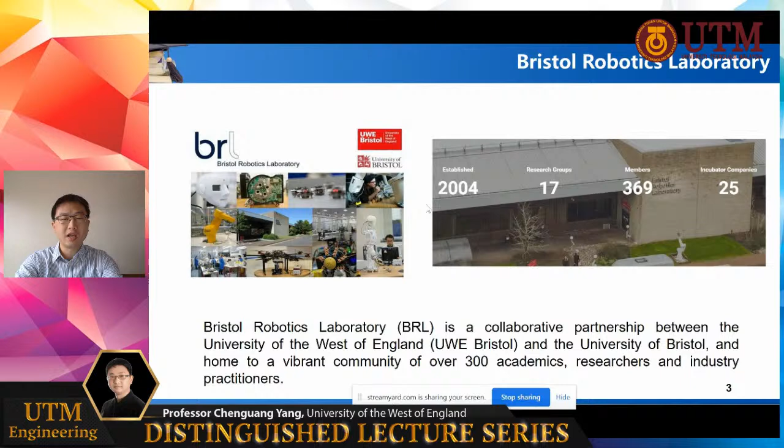In the UK, we have two nationwide large robotics research centers. One is in Edinburgh, another one is in Bristol. Our Bristol Robotics Lab is the first established robotics research center and the largest in the UK. We have over 300 academic staff.

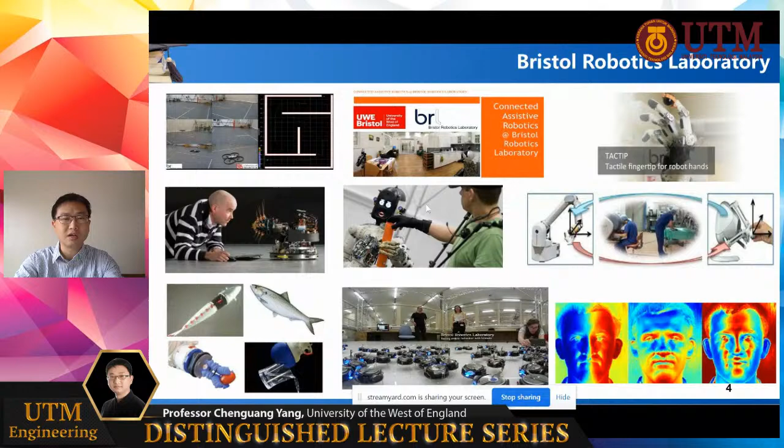In our Bristol Robotics Lab, we have about 20 different research groups. For example, we have the group on machine vision, the group on swarm robotics, and we also have a group dedicated to surgical robotics. Personally, I'm in charge of the robot teleoperation group.

Today my talk will start from the background introduction, and next I will talk about two topics which are closely related to each other. One is from a control point of view, how to implement human-like behavior on robots. Another is how to transfer manipulation skills from a human demonstrator to the robot.

Let's start from the background. Why do we need so-called physical human-robot collaboration? As we know, from the manufacturing point of view, traditionally we have, for example, manual assembly lines, which are of course low productivity because of low speed and low efficiency. To improve the productivity, we introduced so-called robotized manufacturing.

But for the assembly line with robots, we have to pre-program these robots. While towards Industry 4.0, we need more personalized, customized products. That implies we may need to reconfigure the product line from time to time. For this high-variety, low-volume production, we need more flexibility because robots are pre-programmed. If you need to reconfigure the assembly line, you have to reprogram the robot, and you may need to reconfigure the whole product line, which is quite time-consuming and costly.

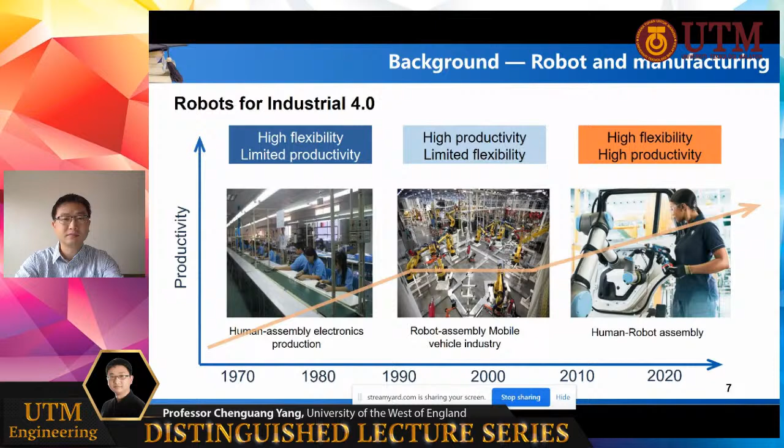As we know, the first industrial robot was introduced in the United States in the 1950s. In early ages, robots were used for motion control tasks, such as welding. For this kind of task, there is no physical contact between the robot and the object or the environment, so the only concern is the accuracy of the motion. Motion control will do all the job.

Well, if you need the robot to interact with the environment or with a human, there will be contact force. Therefore, we need to consider force control. So the so-called hybrid motion force control was introduced.

For example, if we use a robot manipulator to clean a window, you have to maintain a proper force in the normal direction against the glass, while you can plan the motion to move on the surface of the window in the tangent direction. So in this kind of technique, you control force on one dimension and control motion on the other dimensions. It's called hybrid force motion control.

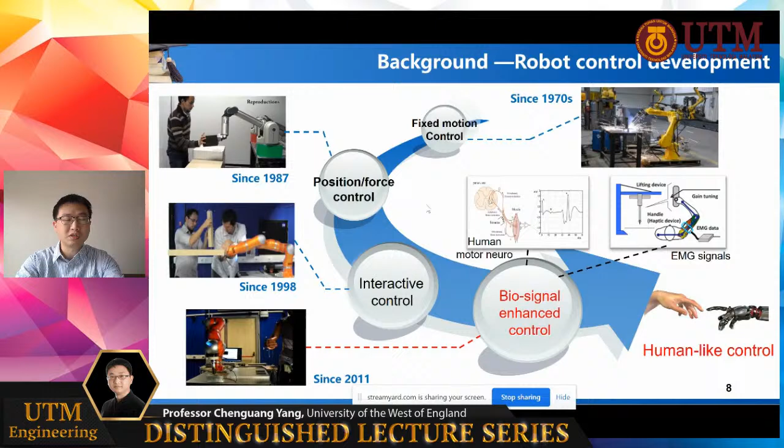Recently, more and more researchers have started to study how we can control the robot to demonstrate more human-like behavior. Therefore, another hot topic of recent study is how we use biosignals to enhance control performance on robots.

My research interest is to enable robots to perform like a human. For this purpose, one method is that we try to model the control mechanism from a neuromotor control point of view. We can do a lot of study on human subjects, how our human neuromotor system controls the musculoskeletal system to perform interactive tasks.

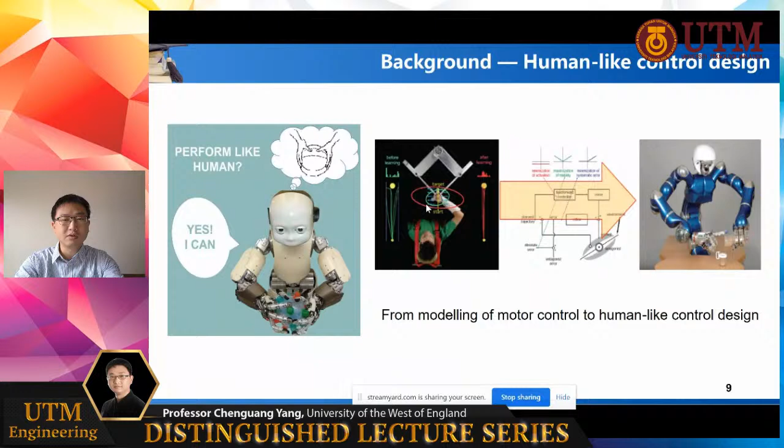We can use human subjects to do the experiment, collect the data from the experiment, and then use control theory such as adaptive control and learning control to model the control mechanism which the neuromotor system uses for human control performance. Then we can modify these models to implement on the robots.

In my research, I also use a lot of electromyography, especially the surface electromyography signal. That is because for interactive tasks between robots and the environment, you can measure the contact force using a force sensor, right? But it's quite hard to measure the stiffness, especially from our human limbs, because we don't have any sensor that can directly measure stiffness.

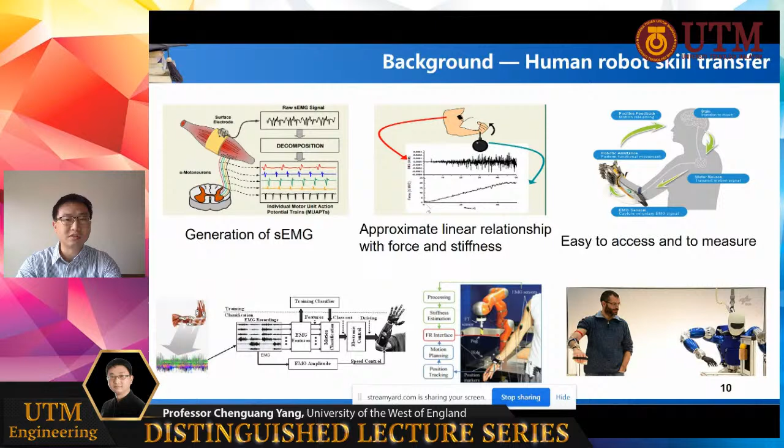But electromyography, this signal which reflects the activation of the muscle, actually gives us a chance to estimate the stiffness and even force from the energy of the signal. We can do filtering and then detect the envelope of the filtered EMG signal, and then use this signal to do online estimation of the stiffness of the human limbs.

Okay, so based on this background technology, I will start to introduce the first topic on the compliant control design of human-like robot performance.

Let's say if someone gives you a disturbance, you will be disturbed and deviated from your original position. But because of the elasticity of our muscle, we will be able to restore back voluntarily. So this kind of elasticity is the property of impedance. You can imagine as if there is a spring connected between the original position and the disturbed position. So we are interested in the stiffness modeled by the spring and the damping modeled by the damper.

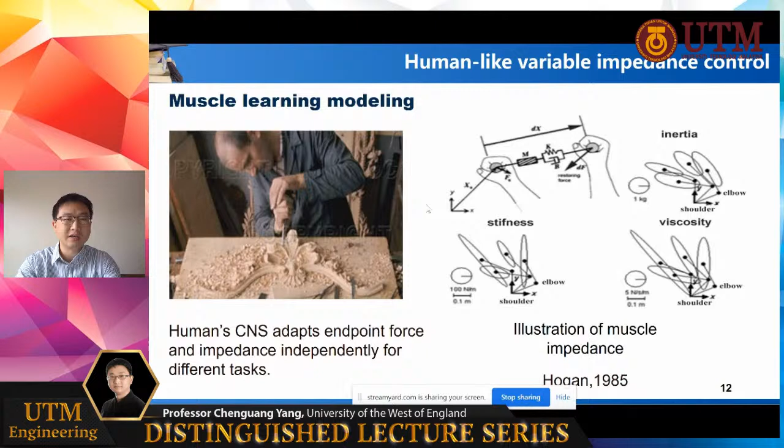This was not experimentally proved until 2001, when our supervisor, Professor Burdet, published his Nature paper. He reported his experimental result. He used a human subject, and the subject was supposed to move along a straight line from the start point to the target point within a force field unknown to the subject. So in the experiment, we suddenly add in the force field while the human subject has no knowledge beforehand.

He used two force fields. One is called the divergence force field. As you can see on the left-hand side, the force field is pointing to two directions. If the human subject's hand is slightly deviated to the left, the force field will push to the left, otherwise push to the right. In the other force field, so-called VF, the direction of the disturbing forces are basically along the same direction.

As we can see, at the beginning the human subjects try to follow the straight line as shown in green. It's not quite straight, but roughly it follows the straight line from start point to end point. When the disturbance force is added, as we can see in the first column from the left, the subject's hand is deviated to either left or right, no longer able to follow the straight line. But after a few trials, the human subject is able to restore back to the straight line.

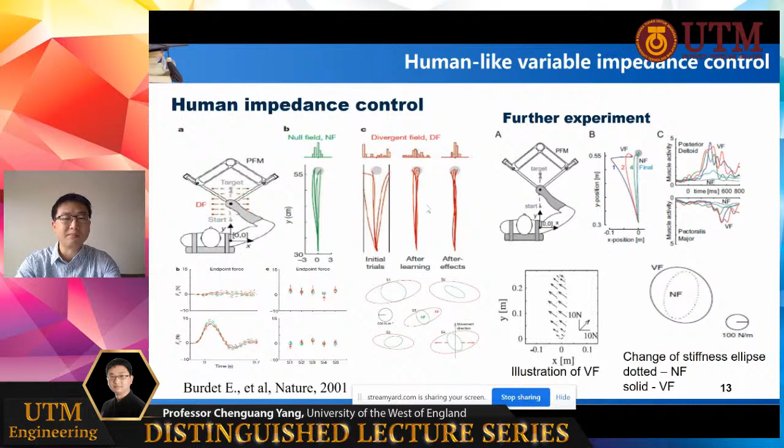Another experiment done by Chib and Mussa-Ivaldi used a similar technique, but he created two force fields within circles, a large circle and a small circle. The force is pointing from the center of the circle along the normal direction to the upside.

So similarly, the human subject is moving along the straight line, but the force will try to push the hands upside. The force is created by a vortex spring, and the stiffness of the vortex spring was increased from 200 Newton per meter to 2000.

When the stiffness of the vortex spring is increased, we can see the adaptation, the change of behavior of the human subjects. At the beginning, when the stiffness is quite low, the force field will feel very soft. In this case, the human subject tries to follow the straight line, as if there is no force field.

While if you gradually increase the stiffness of the vortex spring force, we can see the human subject's motion trajectory becomes more compliant, trying to follow the curvature of the circles, either for the large circle or small circle.

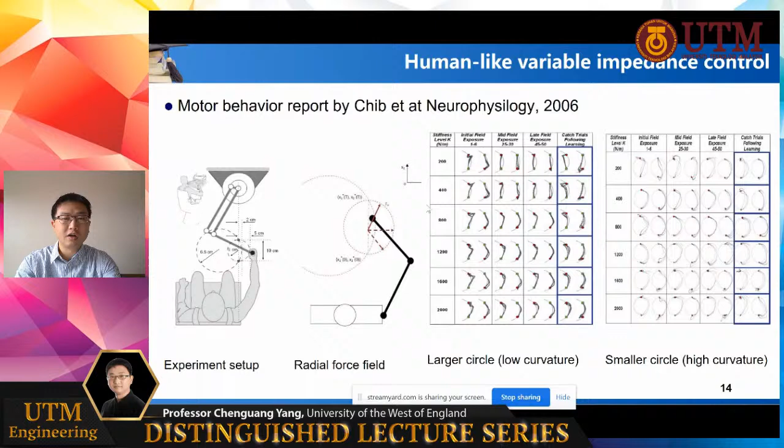And if we suddenly withdraw the force field in the catch trials, we see the human subject did not restore back to the straight line immediately. Rather, they tend to follow the learned curved trajectory when you suddenly remove the force field. So what happened from the control point of view, in the absence of the force field, if you still follow the curved trajectory, that means the reference trajectory of the control system has been modified or adapted, if we think about this problem from a control design point of view.

Therefore, from the above mentioned two experiments, we hypothesized that our neuromotor system is able to adapt force mainly for feed-forward compensation, impedance, and reference trajectory. Therefore, we propose a learning controller to mimic the human behavior. In order to enhance the performance, we also define a cost function, and we use optimization technique to minimize the cost function in order to develop the learning algorithm.

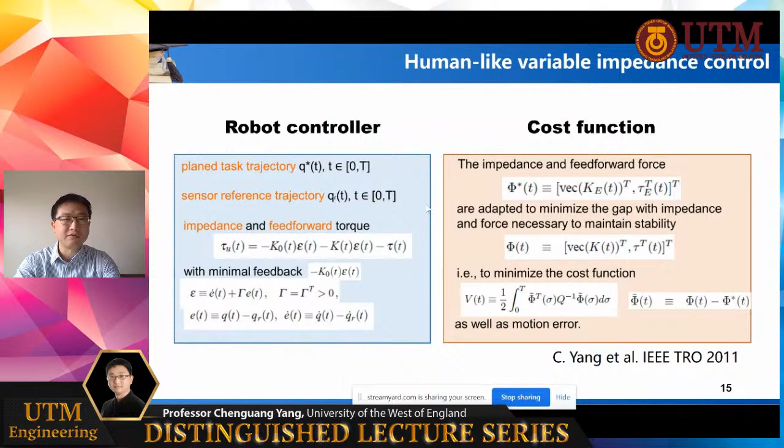How do we adapt trajectory? How do we adapt stiffness and impedance in the presence of the contact force? That's the algorithm we developed from the optimization.

Okay, so to test our controller, we first test it in simulation. In simulation, we create exactly the same force field for the large circle, small circle in the divergence force field and the VF force field. So in all these experiments, we see our algorithm demonstrates quite similar behavior as what we have observed from the human subjects in the experiment.

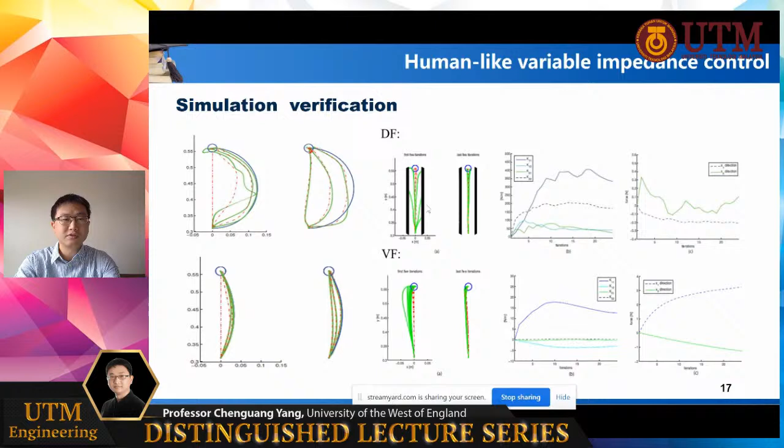And then we implement these models in the physical robot. First, we test the algorithm on a very simple 1 degree of freedom robot. This robot is driven by a variable stiffness motor, which is quite different from the conventional motor, because it can produce both torque and stiffness. Actually, there are two motors in this actuator: one is to produce torque, the other one is to tune the stiffness of the spring in between the load and the shaft of the motor, so that you can change the stiffness of the spring.

So we put a payload on this motor, and we see at the beginning it cannot reach the target, but after a few trials it is able to increase the... Now we remove the payload, and we see there is some overshoot. But after a number of iterations, it will restore back to the target.

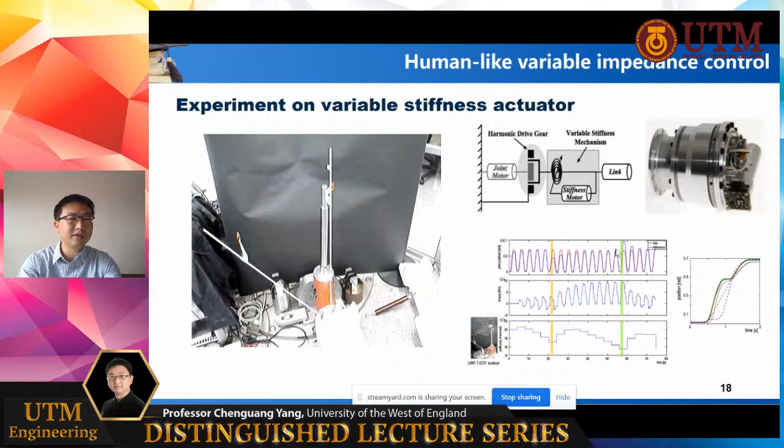And even if you give it a disturbance, it will be able to increase stiffness to compensate for the disturbance.

In the second experiment, we use a 7 degree of freedom KUKA iiwa robot. We manually give disturbance on the vertical direction, and it will stiffen up along this direction, while keeping compliant on the other direction. The robot will only increase stiffness along the direction when the disturbance comes. Even if you give disturbance on a diagonal direction, it will keep compliant on all the other directions.

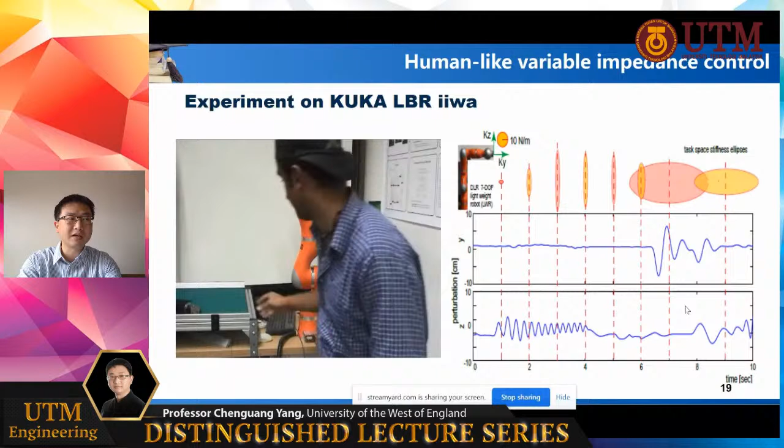As you can see from the data collected from the experiment, the stiffness ellipsoid is only elongated along the direction when you give the disturbance. And we can also put a payload: the robot will try to learn how to increase the feed-forward torques in order to compensate for the gravity of the payload.

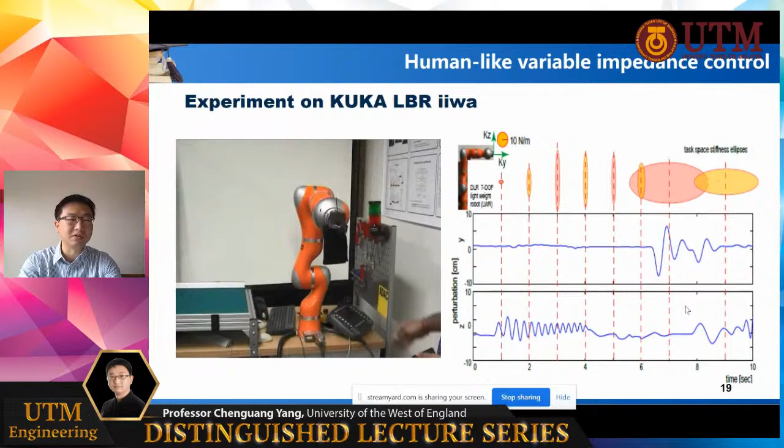We also use these techniques for the insertion task. Similarly, we use a KUKA iiwa robot in this experiment.

We compare our algorithm with the traditional algorithm with fixed impedance. In our algorithm, the impedance is adaptable.

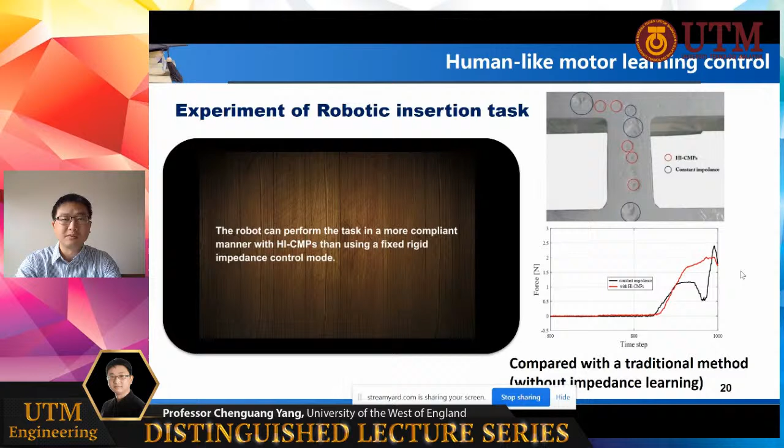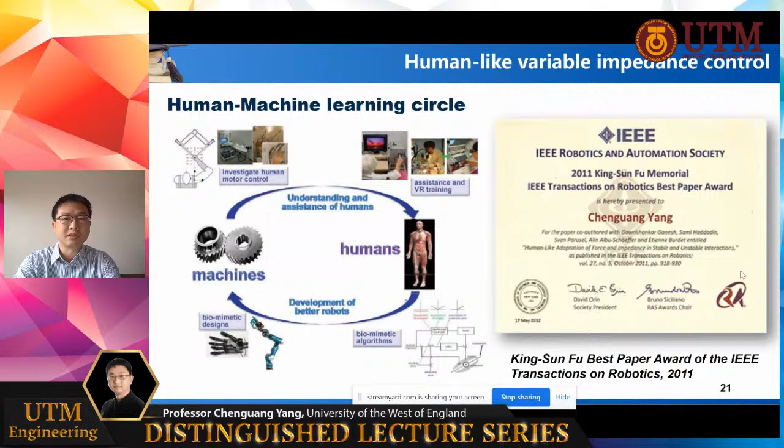The adaptive impedance control we proposed is not only suitable for interaction between robot and environment, it can also be applied for the interaction between robot and human collaborator.

In the next experiment, we show physical collaboration between human and robot for a sawing task. When we collaborate with another person, for example to saw a piece of wood, we need to detect the intention of our collaborator. For example, when he is stiff, we may need to relax our muscle. We need to match the impedance with each other. If we do not match, we cannot cooperate efficiently.

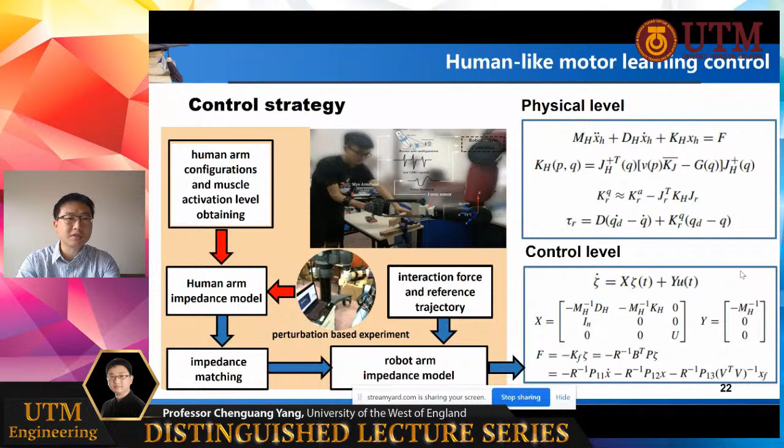In the next experiment, we use a Myo armband to measure the surface electromyography, 8 channels, from the human partner's arm, so that the robot will understand the muscle activation of the human partner.

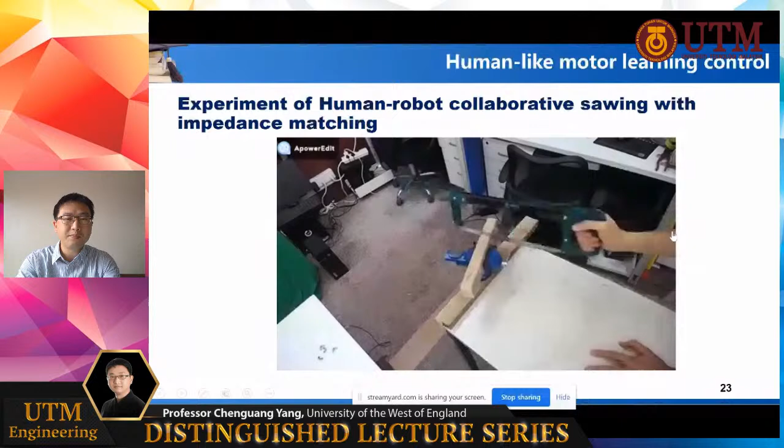To saw a piece of wood with a single arm is not easy, so we use a robot to assist this human. We attach an ATI 6-axis force sensor to the end effector of the Baxter robot arm.

An admittance controller is implemented on the Baxter robot arm, so that it can follow well the motion of the human partner. You can change the motion frequency, you can change the range of motion, and the robot can follow well, but that's not enough.

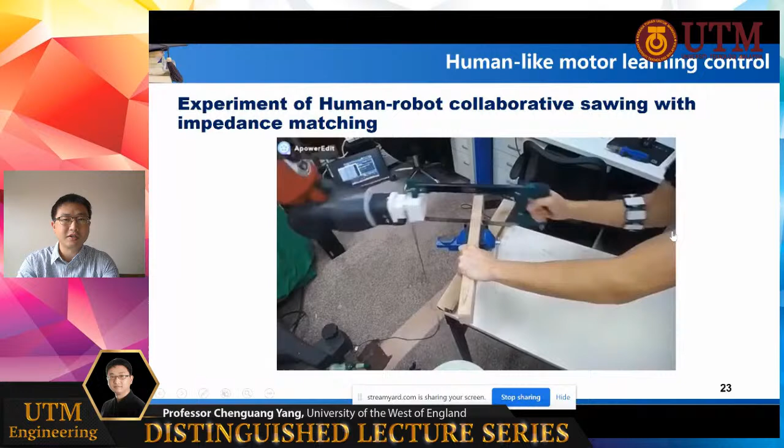We want to optimize the efficiency, meaning we want to save energy and maximize the performance. So the robot actually adapts the parameters of the controller according to the muscle activation measured from the human partner, which is measured from the white armband that captures 8-channel EMG signals.

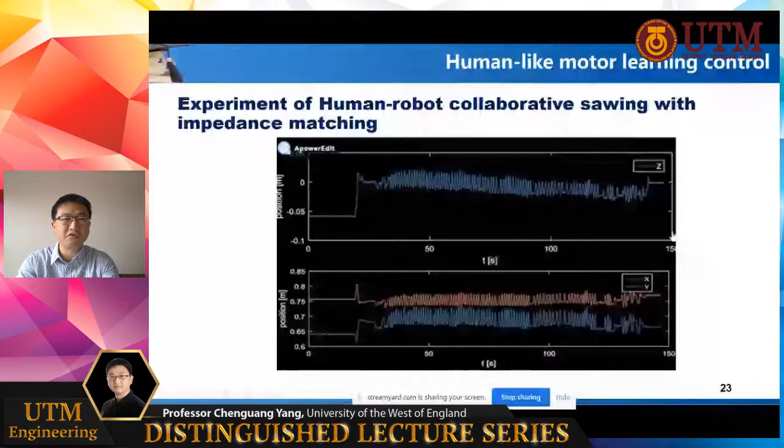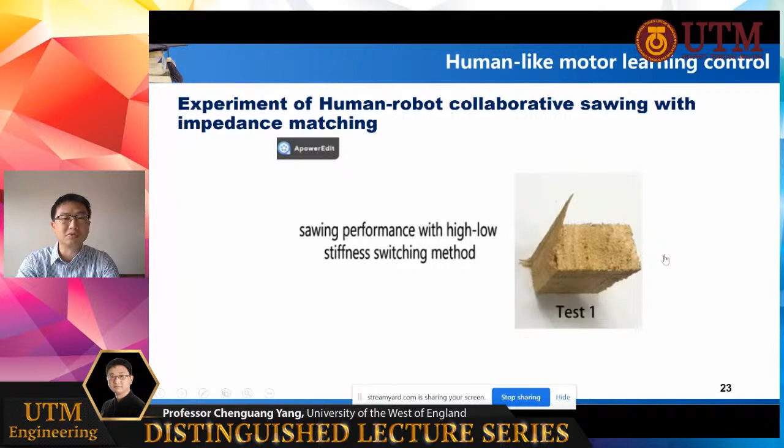From the data analysis, we show that in comparison to the fixed controller, our adaptive controller is able to minimize the energy used by the human partner. The cutting surface using our algorithm is much better than the result without our algorithm, that is, using a fixed controller. As you can see, the surface was not smooth if you do not adapt the control parameters, the impedance parameters.

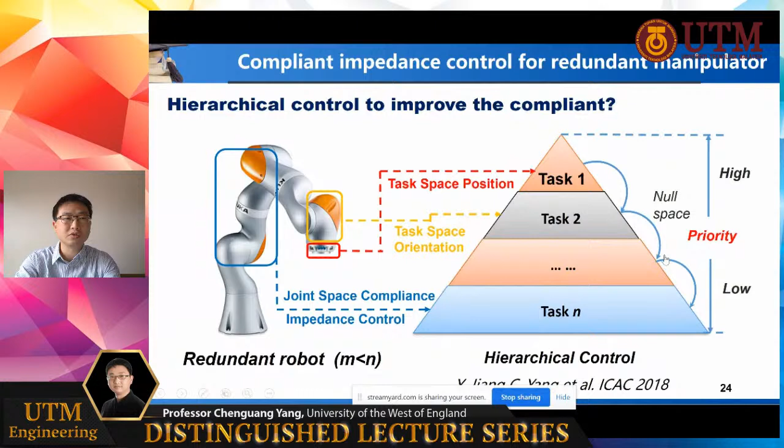We also studied how to adapt impedance not only at the end effector's task space. We can also adapt the impedance at the null space, so we propose a so-called hierarchical control.

For example, when the robot is interacting with the environment, the priority should be the impedance between the end effector and the environment, that's the priority. For each joint, we can also regulate the impedance, making them stiffer or keeping them compliant.

Suppose that while the robot is doing a task, a human collaborator may walk around the robot, so there may be potential collision between the human's body and the robot. Most of the time, we try to keep the joints compliant, such that even in the worst case scenario, when the robot bumps into the human body, if it's compliant enough, we make sure the human is not hurt.

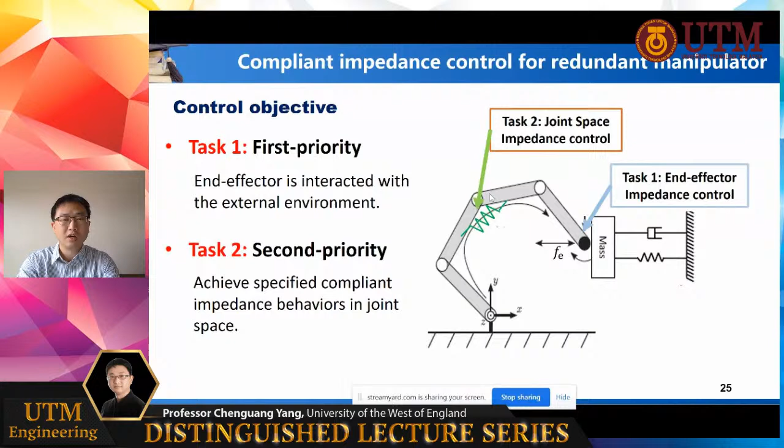This is from a safety point of view. Another advantage of keeping compliant is that you can save a lot of energy.

In the controller design, the priority is task 1, the impedance at the task space, and the second level objective is to keep compliant in the null space. So we try to decouple the space into two spaces: one is for the end effector in the task space, and another is in the null space.

Because the manipulator we used has 7 degrees of freedom, it has kinematic redundancy, meaning 7 is larger than the 6 degrees of freedom in our Cartesian space. So we have a null space, and in the null space we can do controller design to make the motion in the null space compliant.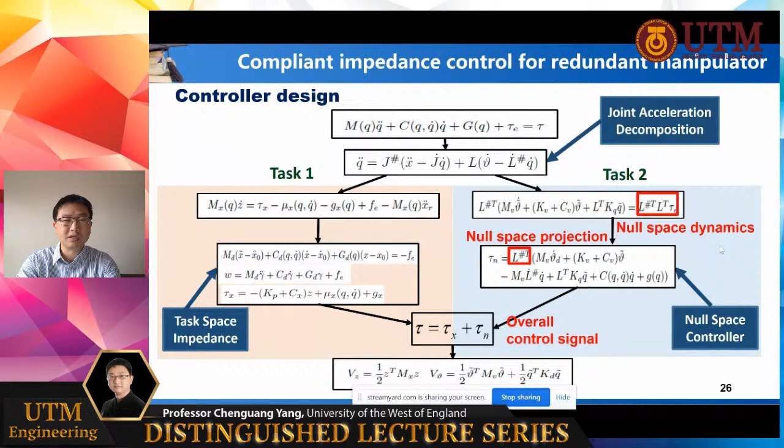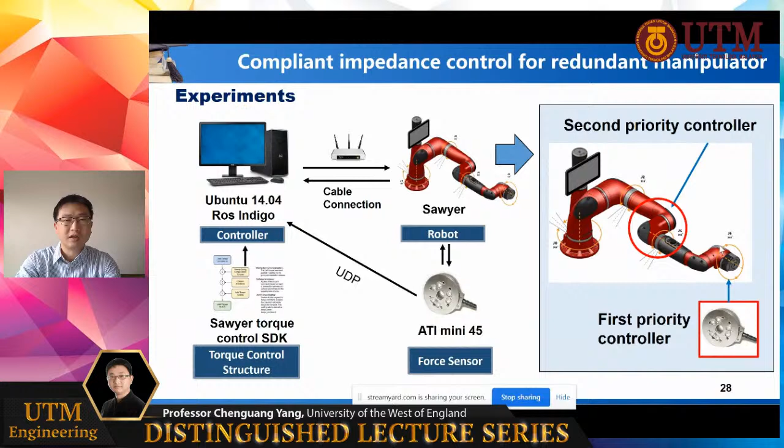In this experiment, we use a Sawyer robot, also made by the Rethink company, which is the next generation of the Baxter robot. At the end effector, we also use the ATI force sensor.

We test the algorithm in a number of different scenarios. At the beginning, we keep the end effector at a set point, meaning we keep the position of the end effector motionless, and implement compliant control in the joint.

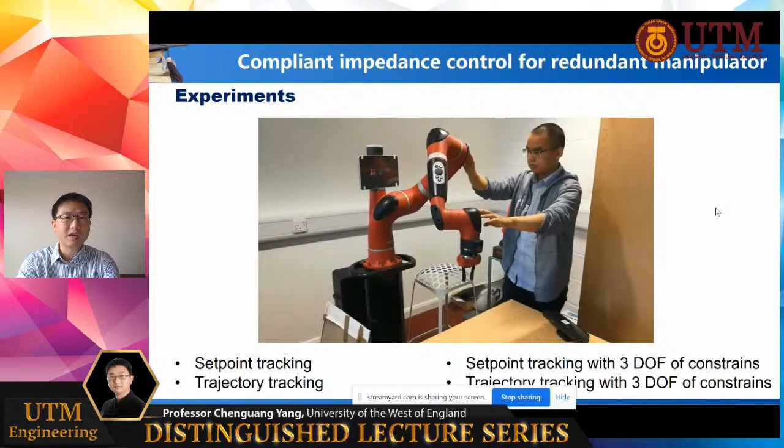So when the human has compliance in the joint space, in the second scenario, we move down, following a sinusoid signal along the vertical direction. At the same time, we try to disturb the robot in the joint space.

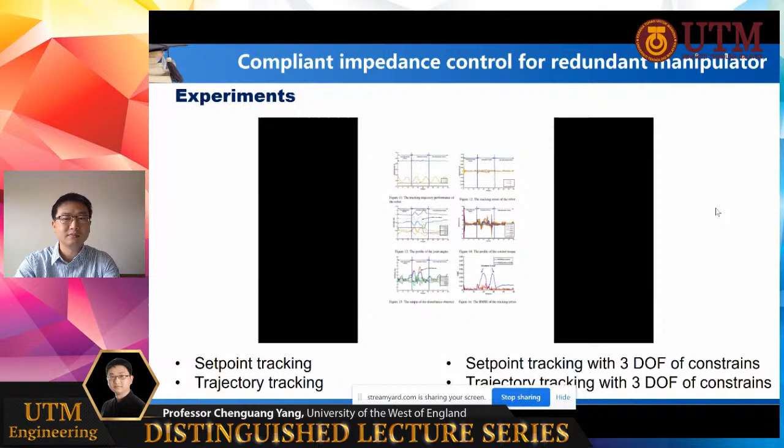Okay, let me move to the next topic: skill representation, learning, and generalization. So in the first topic, we try to demonstrate human-like behavior on robots from a control design point of view.

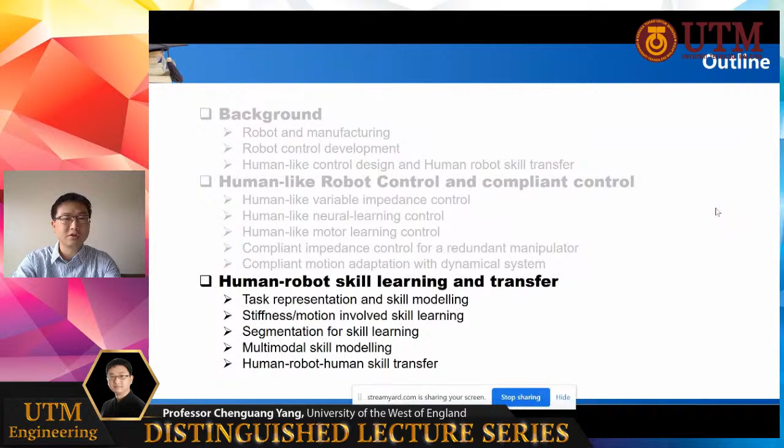Next, we will do the research from a learning point of view. We will try to capture the skills from a human demonstrator and use a number of techniques for the robot to learn the manipulation skills from the demonstrator.

There are a number of different approaches to model the skills. For example, using the hidden semi-Markov model from a statistical approach, while we also try to use the method called dynamic movement primitive. Basically, it uses a dynamic system to model the trajectory, to build a parameterized trajectory.

If you just record the motion trajectory and the force trajectory, you have a large number of sample points. But if you use DMP, you only have very few parameters, 3 or 4 parameters in the model. You can use this model to represent a trajectory with thousands of sample points.

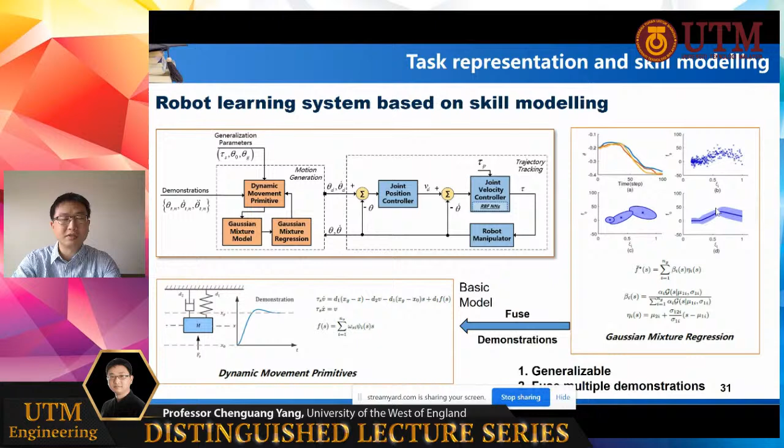It's not enough if we just record the motion trajectory, model it, and reproduce it. When we teach the robot, we would like the robot to be intelligent, to be able to generalize the skill.

For example, we teach the robot to lift up a bottle of water. The next time we teach the robot, the bottle is only half full, and the next time it's a full bottle of water. If the robot does not generalize the skill, the task will fail. But if the robot is able to generalize the skill, it will understand how to use more force to do the new task.

Similarly, let me show the video on the bottom left. We teach the robot how to put a blue block into a green cup.

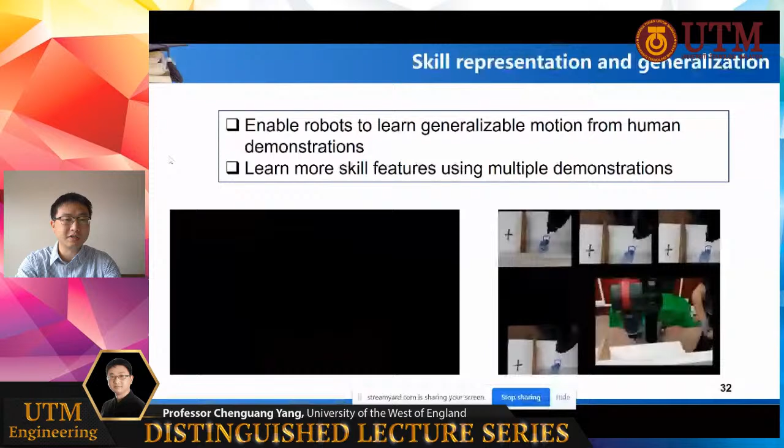We teach the robot a number of times, because as humans we may make mistakes. So we teach it several times and use a Gaussian mixture model to combine these demonstrations to make sure the robot learns the best result. So of course the robot can reproduce the motion.

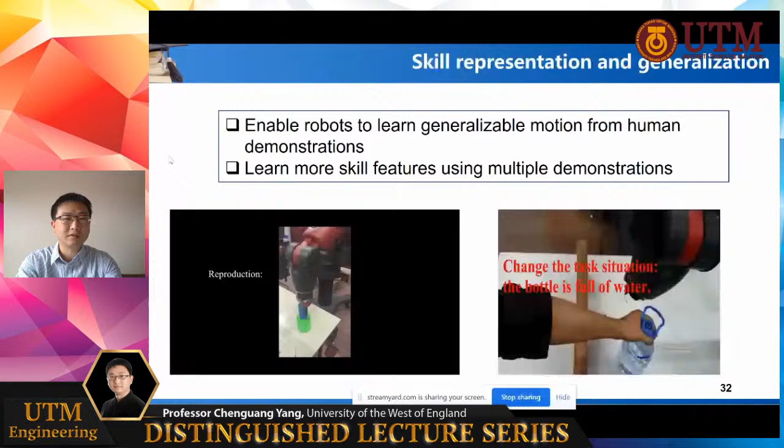It can place the blue block into the green cup. The next time, we change the location of the green cup, moving it from the upper corner to the bottom corner. After detecting the new location of the target from the camera, the robot is able to replan the trajectory, and it's all automatic.

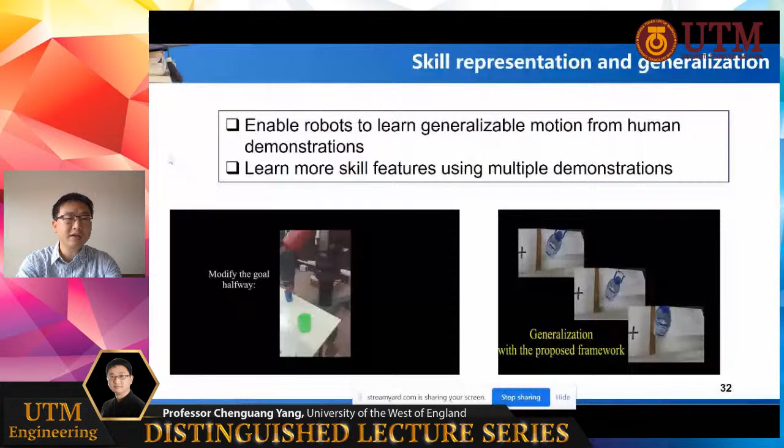Even if, when the robot has already started the motion, you change the target position, moving the green cup from one point to another, it will automatically replan the trajectory mid-move and make sure it reaches the correct destination. All this happens automatically. The algorithm can automatically tune the parameters in the DMP model so the robot reaches the new target.

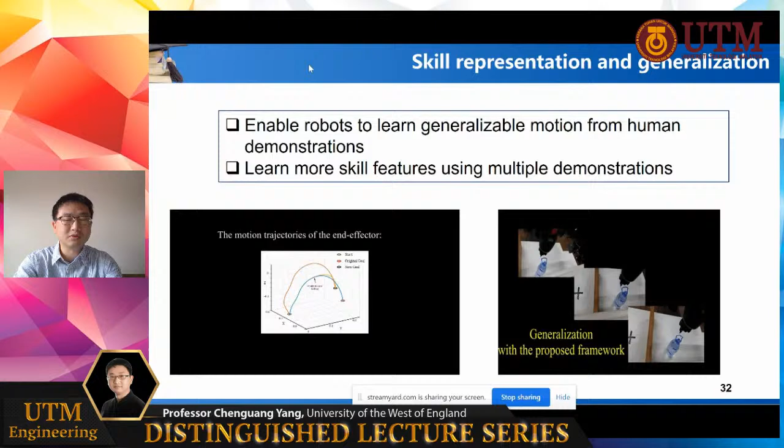While the experiment mentioned before is just for motion control, we are more interested in tasks with contact force. So we have to use a force sensor and stiffness regulation.

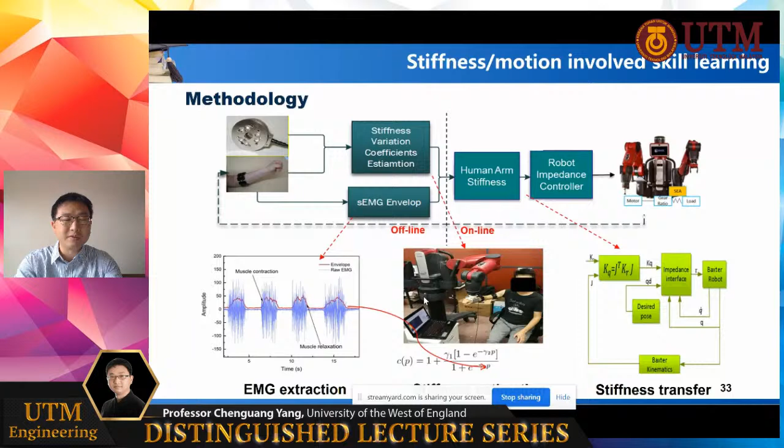So in order to estimate the stiffness, we use EMG signal as mentioned. We do some calibration beforehand in the experiment, building a mapping between the EMG signal and the stiffness.

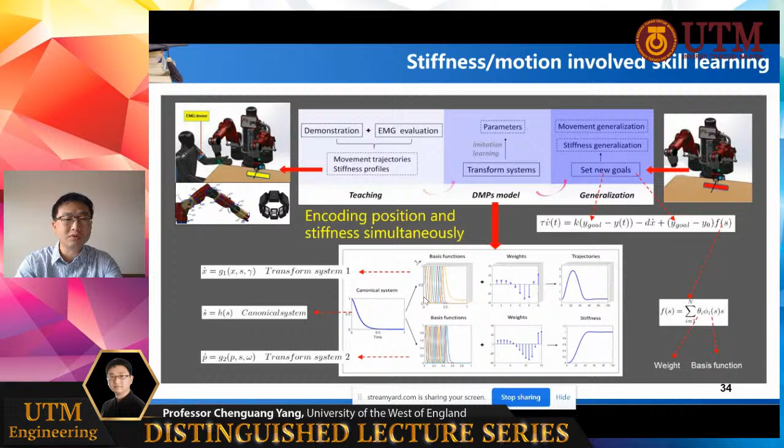Then we use a pair of DMP models, one to model the motion and one to model the stiffness. As we know, the stiffness of our limb depends not only on muscle activation but also on posture.

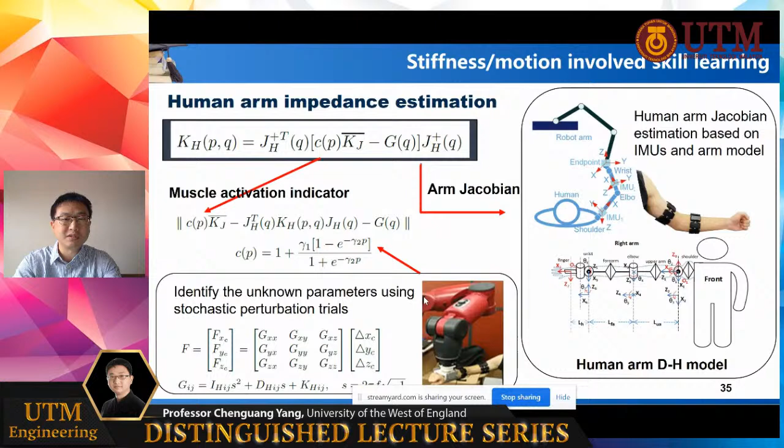So we have to calculate the Jacobian matrix. In the calibration, we use the robot to produce some mechanical impulses to test and calculate the stiffness, fitting a second-order system, and then we can build a mapping between the EMG signal and the mechanical impedance. Once these are ready, we are able to estimate the stiffness online.

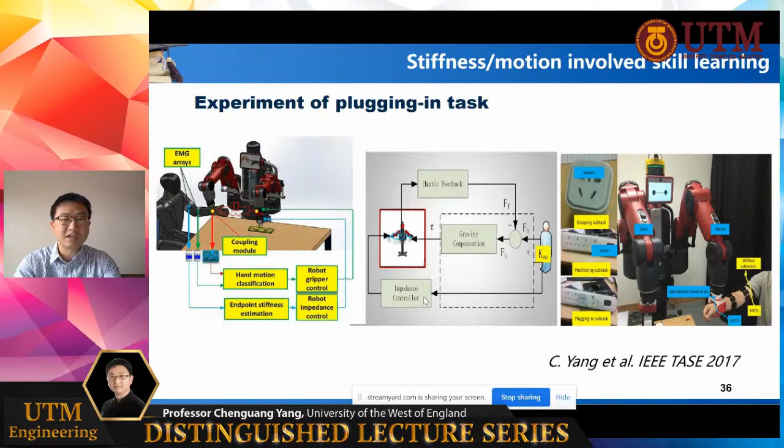As shown in the next experiment, we teach the robot the plug-in task, plugging into a socket.

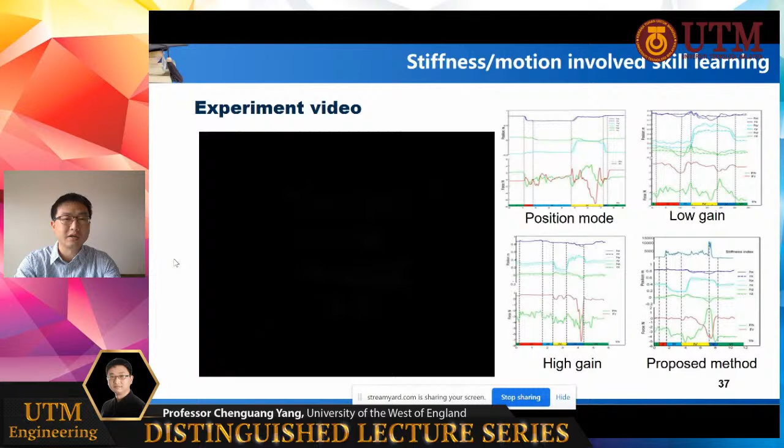If we just teach the motion to the robot, even if the robot can reproduce the motion 100% accurate, it may fail the task because the robot does not know how much force and stiffness it should use for this insertion task. For this kind of task, motion control alone is not enough.

You need to apply proper force and maintain correct stiffness in order to insert the plug into the socket. So we use a dual arm teaching by demonstration interface. The right arm provides force feedback to the left arm, which is connected to the human demonstrator, and the human demonstrator also mirrors the EMG signal. In the presence of force feedback, the human demonstrator knows how much force and stiffness he should use to complete the task.

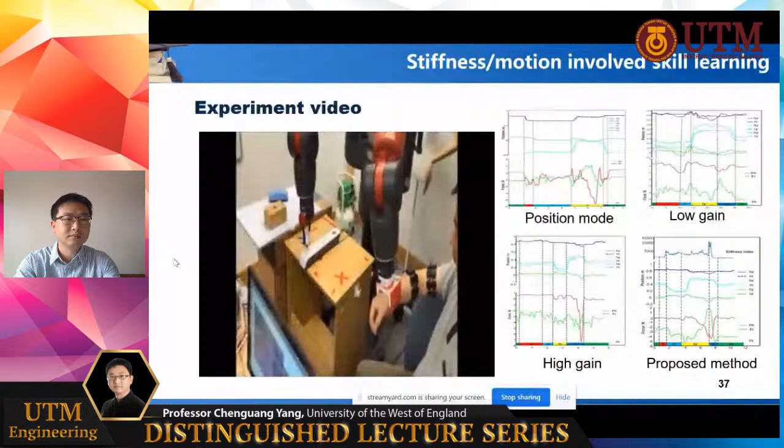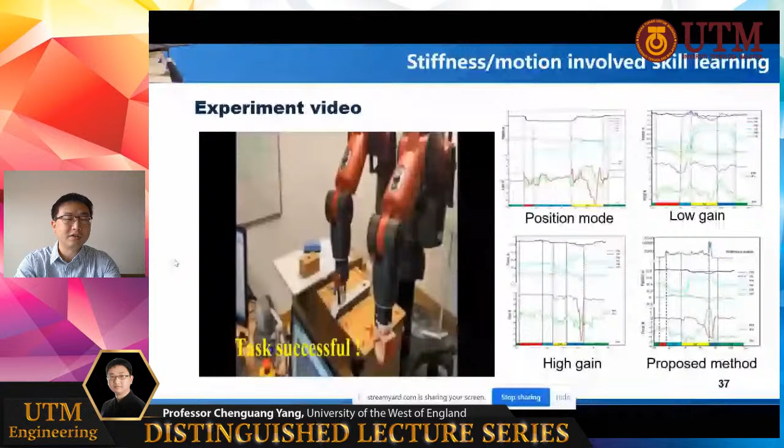We actually use two armbands because the IMU sensor in the armband gives the joint angles, so we can calculate the Jacobian matrix. Finally, the task was successful when we did the plug insertion.

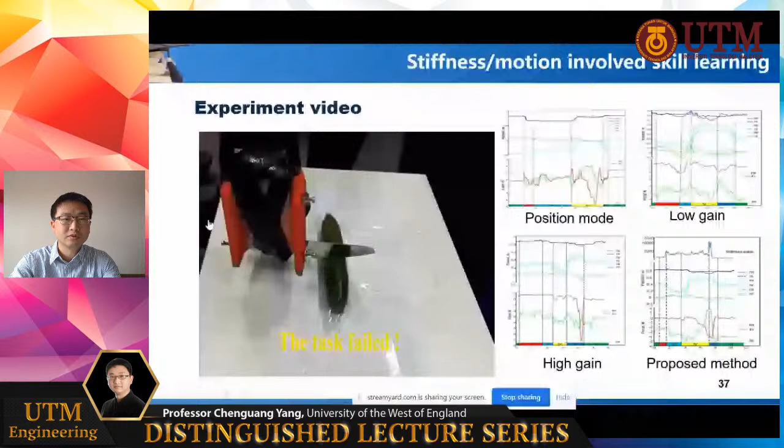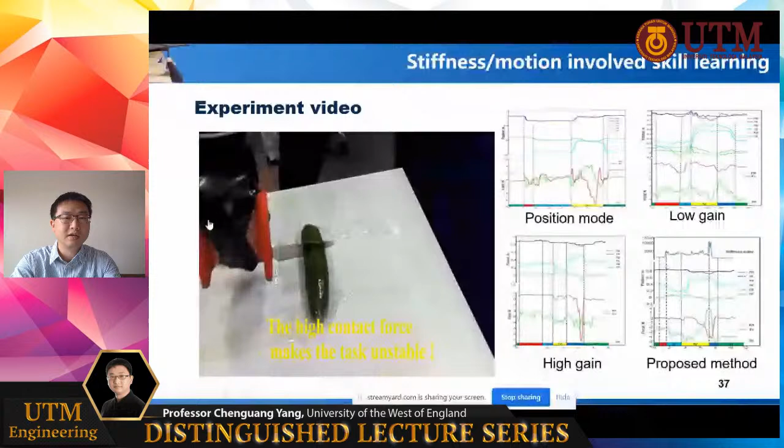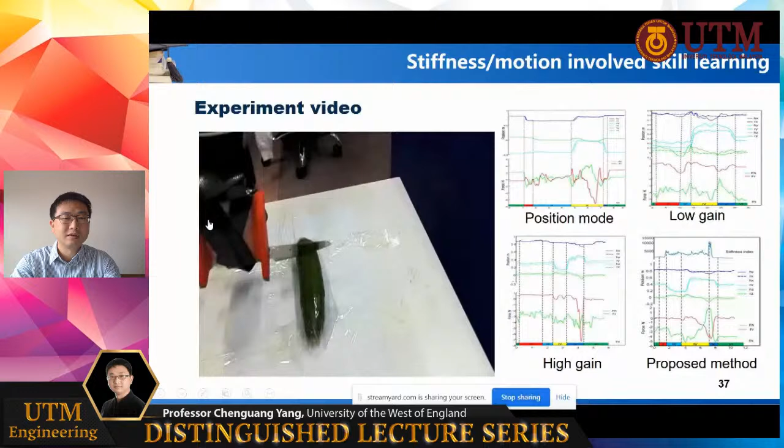We also do a similar task for cutting, for example to cut a cucumber, a potato, or an apple. You have to also generalize. We compare with a fixed controller with either low stiffness or high stiffness, and as we can see, using our algorithm with variable stiffness to mimic the muscle activation from the demonstrator, the cutting performance is best because it's smooth and efficient.

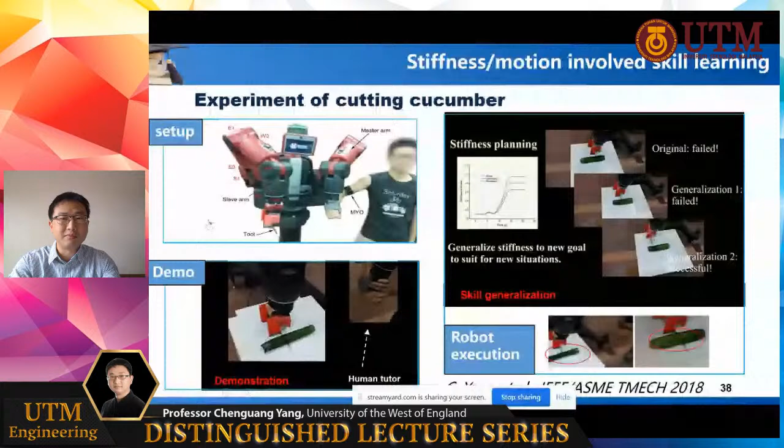Next time we change to cut a different cucumber, our algorithm is able to adapt the parameters to generalize the skill, so it can cut different cucumbers.

For each subtask we use a DMP to model the skill. The advantage of dividing into subtasks is that if something changes, for example if the obstacle becomes higher, you only need to modify the trajectory of that particular subtask. You only need to adapt the DMP parameters for that particular subtask.

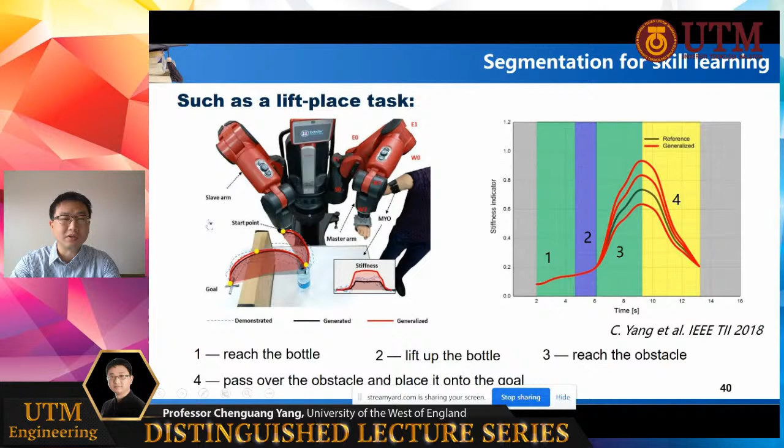I will use another experiment to show why we need segmentation. For example, we teach the robot to write Chinese characters. There are thousands of Chinese characters, and you cannot show the robot each one of them.

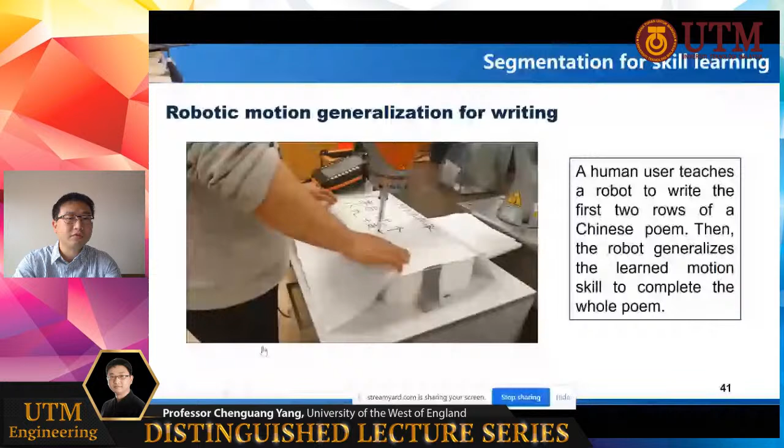If you just teach the robot to write a few Chinese characters, the robot will try to decompose the Chinese character into different strokes, then try to recombine these strokes to write something completely new, but keep the writing style of the demonstrator.

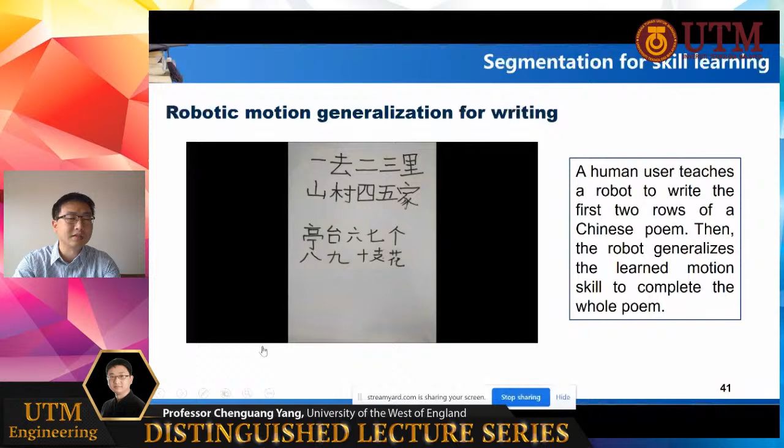In this result, the first 2 lines were written by the demonstrator, with the demonstrator's hand guiding the robot. The next 2 lines were written by the robot itself, and these characters were never taught by the demonstrator. The robot figured out how to write each stroke and then recombined the strokes to write something completely new.

In summary, we propose a framework for skill modeling, representation, learning, and generalization. In a recent publication, in addition to stiffness and motion, we also model the force trajectory, and we build models of the correlation between all three, so we can reproduce all three elements at the same time, from demonstration, segmentation, alignment, to generalization. That's our general framework.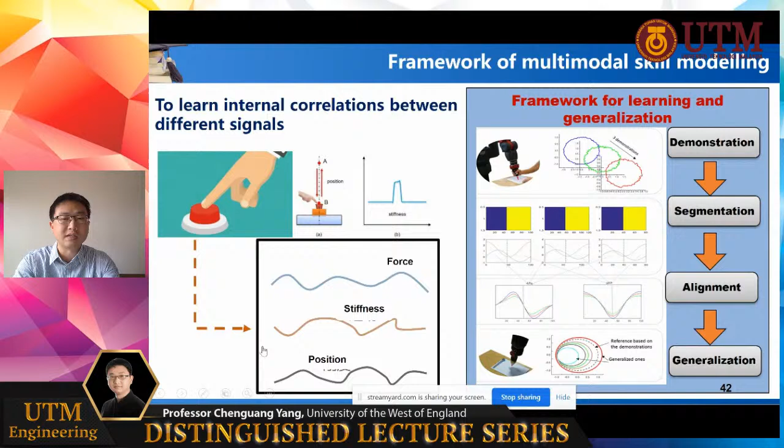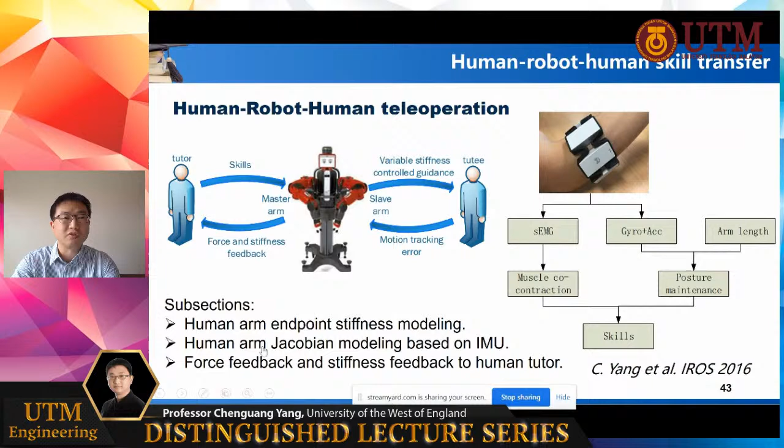We also try to use the robot as a medium to transfer skill from human to another human, from tutor to tutee, because we were already able to transfer skill from human to the robot. So we want to extend our research to further transfer the skill from the robot to another human.

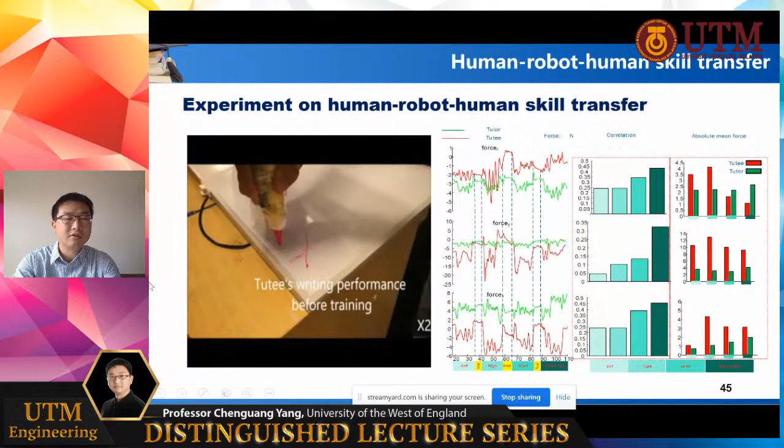Let me show the result. We have 2 students, one from China, one from Iraq. The Chinese student tried to teach the Iraqi student how to write a Chinese character.

They are coupled through the dual arm of the Baxter robot. These 2 robot arms were virtually connected through a virtual spring damper system.

We think this research would be quite useful for applications such as rehab, because a therapist needs to spend a lot of time with a patient for repetitive tasks. If we model the skill of the therapist and transfer it to the robot, then the robot can provide guidance to the patient for repetitive tasks, doing the same thing again and again, repeating the exercise.

So in the experiment, after a few trials, the tutor will be free, and the student will be purely guided by the robot to repeat the writing exercise.

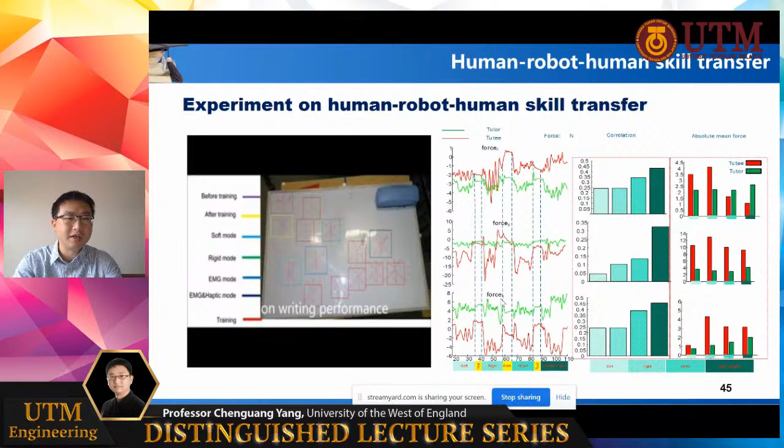Okay, after about 10 times of writing, finally we test the learning results. And after this learning, we see the writing skill of this Iraqi student is much improved. Our algorithm with haptic feedback to the tutor with EMG-based variable stiffness, these techniques perform best compared to other fixed controllers. Okay, that's the end of my talk. Thank you very much for all the audience, and I would be happy to answer any questions from the audience. Thank you.

Thank you, Professor Chenguang. It's a very amazing and interesting topic that you have shared, and it's good to see that there are other ways to robot control and beyond that. And I have some questions here. Maybe I will start to ask a few first. And there is an audience asking from Muhammad Al Mola.

Is it robust to external disturbance? Sorry, can you say that again, Chofai? Is it robust to external disturbance? For example, I think you were mentioning you use impedance control to control the robot, and then you were using a different kind of method to train the robot to learn and perform some tasks. But let's say there are other noises and disturbances from external sources. Is it robust to this kind of disturbance?

Yes, our controller is not only optimal, it is also robust. As shown in the videos, we disturb the robot manually. We give a lot of disturbance to the robot. For external disturbance, no problem. Our algorithms are robust, and we are also robust to noise, for measurement noise.